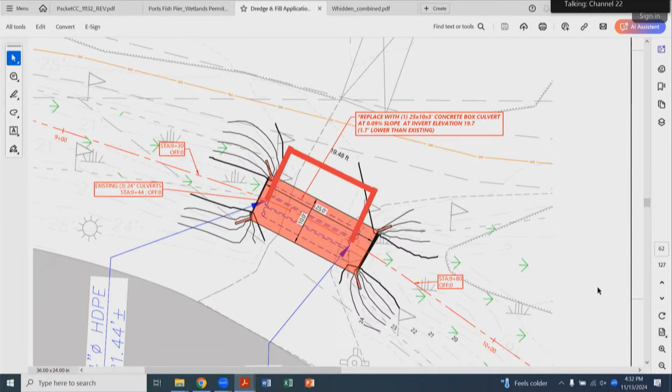Great. So I think what we discussed in the field is we would vote on the DES permit and then do a work session for the CUP. And then if anything changed coming out of the work session for the CUP that needed to then be changed in the DES permit, I guess you would go for an amendment, is that right, to the DES permit?

It's one of two things. We have 60 days, because we received the RFMI, to respond or request an extension, depending on their timing with the conditional use process. If there are going to be serious changes to the plans, we'll hold off until there's an approved submittal.

I don't know, it's been a while since I've gone through the Portsmouth conditional use process since it went online, so I'm not too sure what significant changes might occur. So maybe it makes sense to do the work session for the CUP first, and then based on what we talk about, decide whether or not you want us to go forward with the DES. I think we talked in the field that you guys have to go through because you already requested the extension.

Okay, got it. The next meeting wouldn't. So, as far as DES is concerned, it's more or less, do you object to the project? Right, and then we can, okay.

So then, should we do a work session first to discuss everything? Would that be the best way to do it? I don't know, it's a little, I'm not sure how much. Horse before the cart or whatever. The general discussion and premise of the...

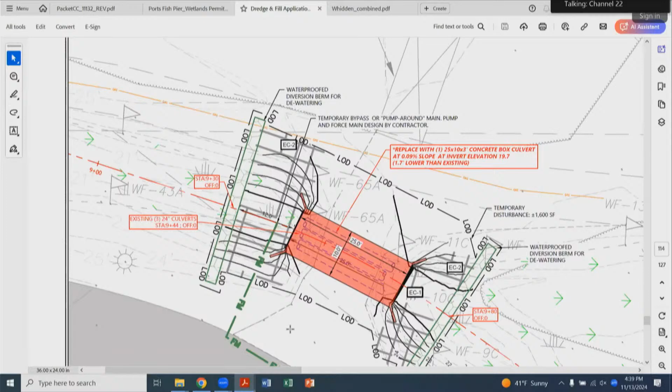So then how is it going to be revegetated? I believe that's on the following page, and I think it's jute matting to be maintained, just side slope stabilization.

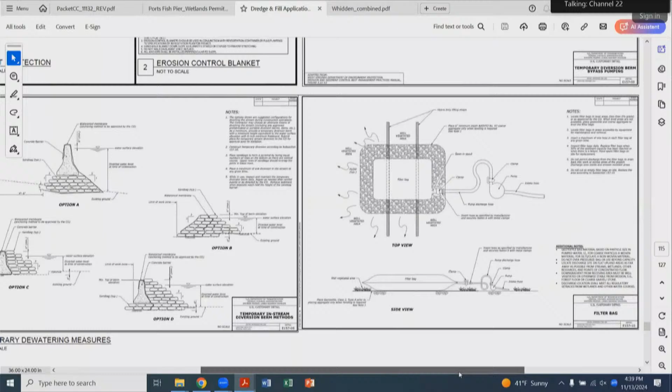I know there's some management of the bank right now on either side, general landscaping, but to my knowledge it's not supposed to be let go natural to totally revegetate. It's not the plan, or I don't believe so. It probably will go back to what it is right now. Currently, looking at the crossing on the left side, it was grass with some small emergent vegetation. On the right side, it was more persistent vegetation with cattails and stuff growing on the bank.

So they're not planning on... sorry, I can't find the sheet I'm looking for. There were grading notes on page 109 in the packet for this project, in C2002.

Can I ask, they do mention fertilizer as part of their revegetation plan, in several places. Barbara, you said they do mention fertilizer? Yeah, you see it on a lot of the sheets, CO-01, C200.

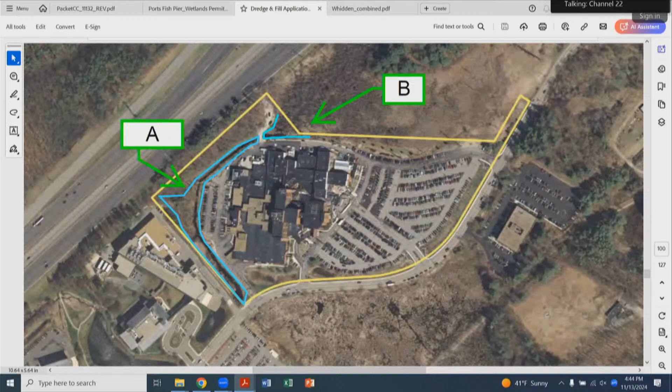Has it been researched or not? No, because it's not clear. I don't believe the only thing looked at as far as that southern wetland was the entire drainage area for what is going through that culvert. It's really not that one specific area. It would be similar to looking at one of the Liberty Mutual ponds - I understand the size difference, but everything's connected. We can't look at that drainage without considering it's connected to the wetland on the other side of the road and say we don't need to look at it because it's not part of the project.

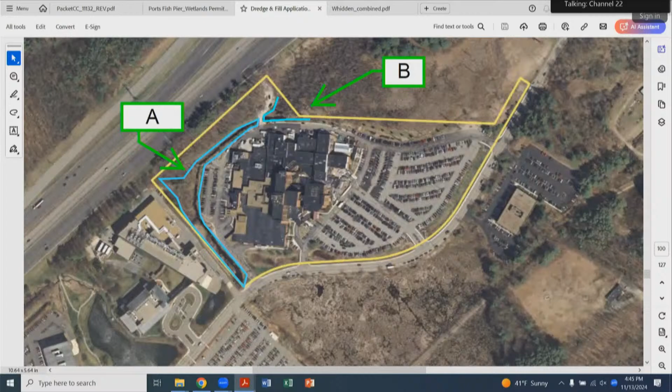That was one of the issues brought up by... his name slips me, I remember his first name, Dave... Devosis? Yes. He was saying that area is causing flooding because of our drainage area, it's not accepting that water. So the idea behind this is to improve that, not necessarily drain it, but during storm events, accept more water.

As far as what its specific hydrologic contribution is and how that will be affected, we've not looked into it. And rather than drain it, has there been any consideration given to increasing the amount of water that can be absorbed by that area through plantings or anything else? Not in that regard, no. As far as trying to mitigate by water consumption from vascular plants, no.

Thank you. Yep. Other questions?

Going back to a topic we already talked about, there is an apron, a riprap apron. Maybe that's what you were referring to. In the last sheet I think I saw outlet protection, and the dimensions are actually not very easy to decipher. It's on the last sheet for the plans, our far left, up, yeah.

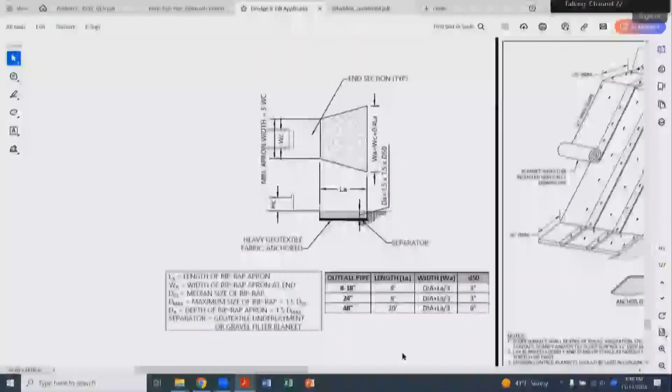If a riprap apron was required due to any velocity issues, and if there are any plan changes to this, we'd have to go back to Fish and Game to make sure. If he was proposing riprap, they would probably come back and say they want smooth river stone or something more turtle friendly.

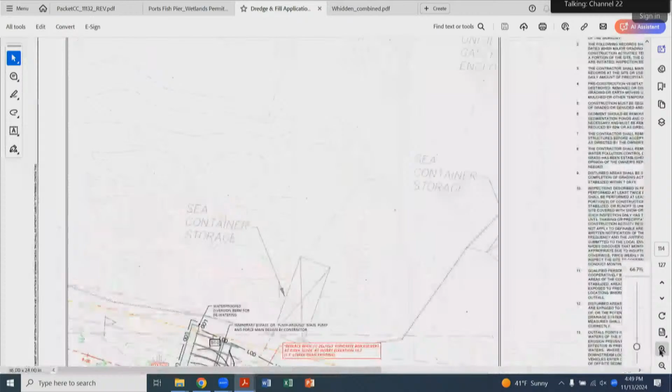Looking at this diagram, there are gray lines at either end of the box culvert. Are those just depicting the areas that are going to be regraded using that blanket? That's my understanding. They have a legend on this page showing what things are supposed to be, and that's EC2, permanent stabilization, in the second box down.

They also call out outlet protection, but if you note, it's not shown anywhere. I'm not sure if it's just a copy and paste error on the drawings or not.

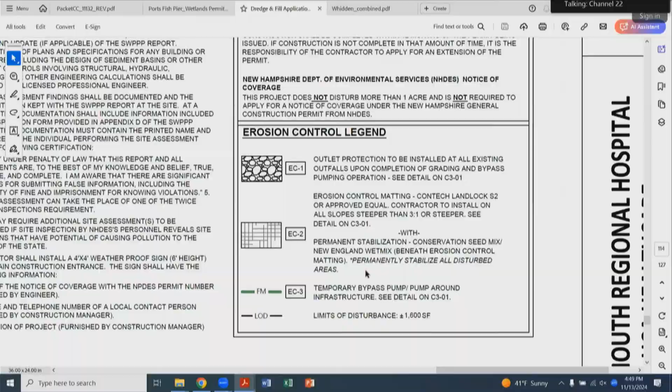So do your impact numbers reflect riprap? Do you know? The impact area, as far as the permanent impacts, those numbers were taken from what the engineer told us they were, and we tried to relay those from the plan. The engineer's from Kentucky, so they're not 100% familiar with the process and what we consider temporary and permanent impacts. I don't know if it's just standard practice that they put riprap at the end of their culverts or not, and just don't show it on the plan.

The engineer has to be New Hampshire state certified. They do, I think. Oh, no, I thought that was a question. Sorry. Well, I would hope, even if they're from Kentucky, they would know what they're doing. I know that they're a professional engineer, I just don't know if they're up to spec on what's required for the state permitting stuff.

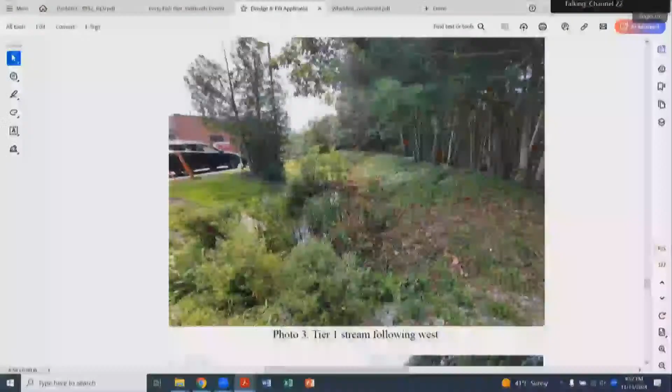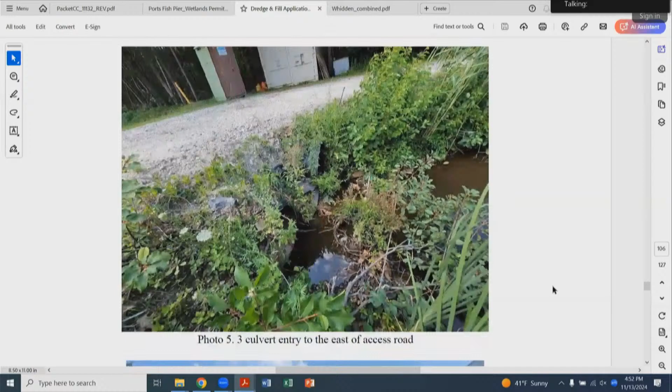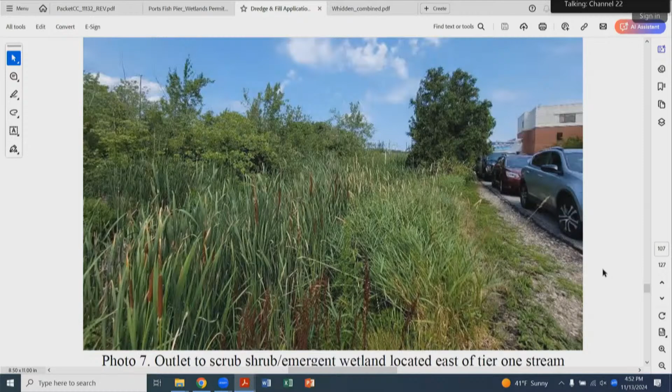And then on the other side, to the right of the crossing, it's not as prevalent in some areas, but it's definitely present on the site. So there's no mention in the plans of any attempt to control the spread of it. I don't believe that it's part of our proposal. Given its prevalence in the area, it's not something we can really control. Maybe occasional cutting, but with proximity of everything in the area, it's an invasive species.

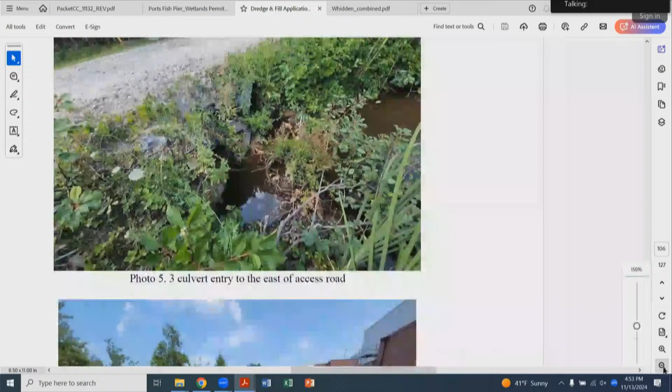So this goes along with the questions about vegetation, and there aren't really any details on what you're going to be planting, and if there's any attempt to not let the invasives be on the new banks you create at that point, and that you have something you're planting to avoid that, and what that is.

Any other questions? Okay, does someone want to make a motion for discussion purposes? This is for the DES wetland permit. I'll make a motion to recommend approval of 333 Borthwick, with probably some additional stipulations that this group will decide on during discussion. Do we have a second? Yep, second that.

I think there was a detail for the top of the culvert showing—there it is, thank you. Re-gravelled and compacted. It looks like it's 1.5 foot of compacted gravel backfill on top.

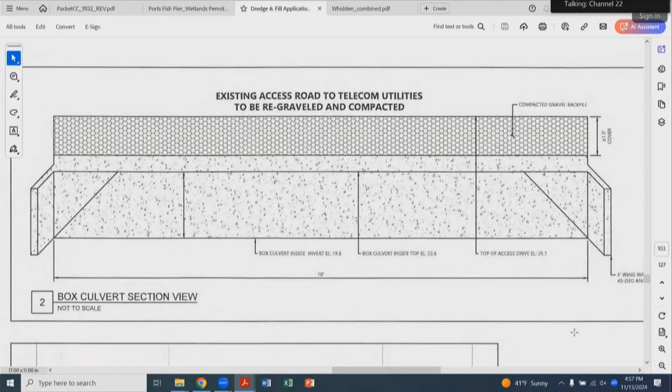The only other thing I could think of for the riprap apron was for the dewatering, because when you're bypassing that, it needs some kind of protection. I can't find it in the plans right now, but that's the only other thought I had on it. As a temporary kind of thing, and probably in the uplands, not directly discharged into the wetland.

So two things. One, with the fertilizer, I think maybe the best way to do it is to just make a note that the notes in the plans again do not include fertilizer application.

I had a question about the riprap on the bank. Did we all decide that wasn't going to happen? It sounded like there was no riprap on the bank. It doesn't look like it was. Yeah, it's just gonna remain as graded work. We don't need that—mats are clarified.

No, because when I looked, you see the detail of the... yeah, I think it's all the way at the end, sorry. Yeah, there you go.

The dark gray lines, I think, are that matting. Yeah, I think it's just grading. To my knowledge, it would be kind of an outlier from what's there right now—aesthetically, it wouldn't match what those banks are.

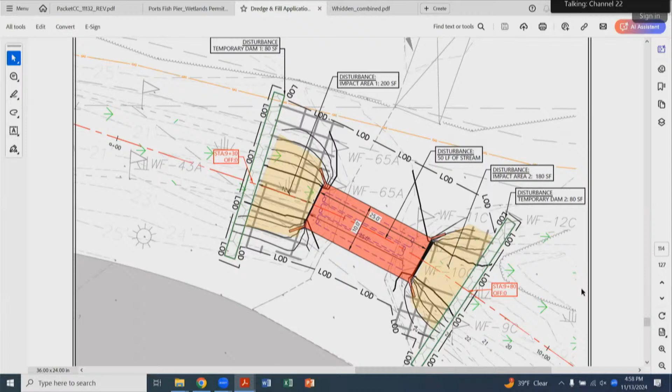So we don't need to comment on that? I don't think so. I think the point of clarification is the apron—they're showing the detail, but it's not on the plan, because it doesn't show anywhere on that plan riprap. Which is what I was confused about at first, but.

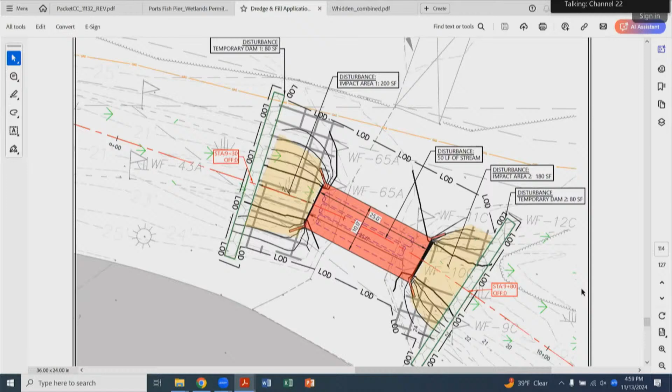Anything else you want to put in this letter about concerns? Just to clarify, I am seeing on that drawing where it says EC1, so that's calling for outlet protection, and then it calls on that detail with the apron.

But it's not on the plan—there's no... it's probably too small, I don't know. So you're right, it's called out in the legend for it, but not clearly shown.

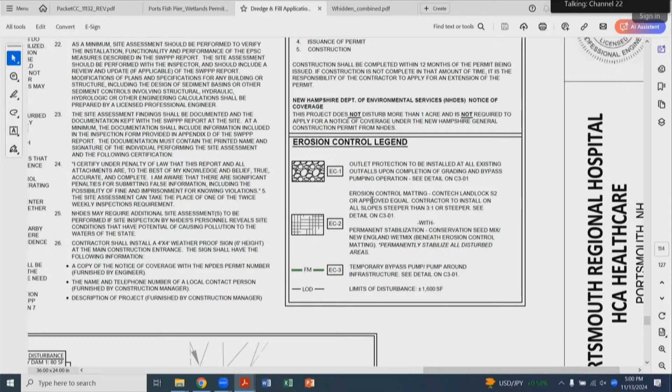This is the erosion control plan. So whether that's like a temporary solution to get the construction done, or whether that's like a long-term installation, it's a little unclear to me.

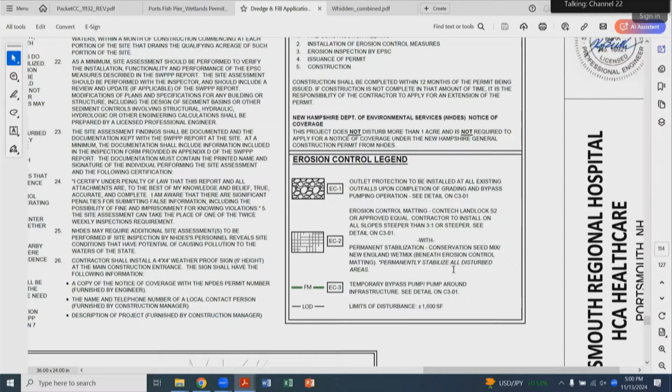Yeah, it does say upon completion of grading and bypass pumping operations, so it does make it sound like it is permanent and not just temporary.

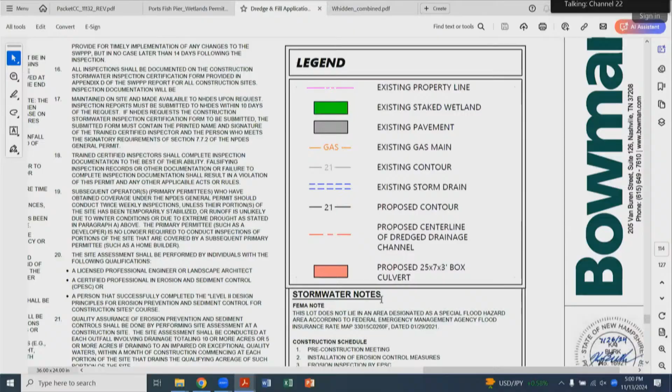So it would be nice to see where and how much, and how big, and is that really necessary, given that there isn't a huge concern for erosion?

Well, we do think there's going to be some dredging on either side, and there's going to be reshaping of that channel to go back. So there's a plan.

The initial design of this crossing—not crossing, but the whole channel—had an initial design slope. So the idea is to, in this area, bring it back to that original channel depth and everything, to kind of reestablish that. I think on the bottom right side, it kind of developed a little hole there, and I think they're gonna just reshape that so that it's more streamlined and not just a hole on the other side of the culvert.

Anything else anyone wants to add or talk about? We'll have another opportunity during the work session part.

This is sort of me just talking off the top of my head, but it seems like there's a lot of conditions we have here. I don't know if it's better to approve or deny with the conditions, because they're still going to have to do what they have, they'll still approve it eventually. We just have to make it clear that even if we approve, these are stipulations, and that doesn't work as well on the other end as it does for us.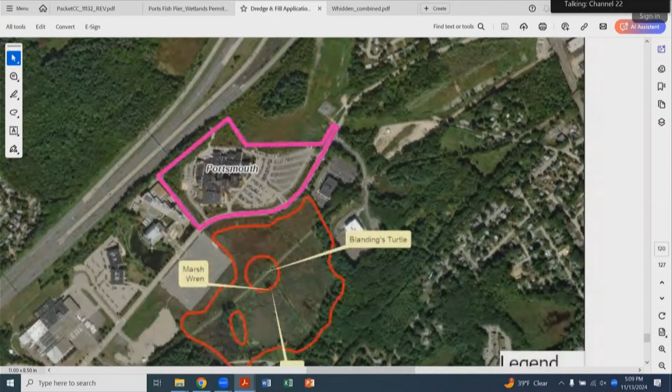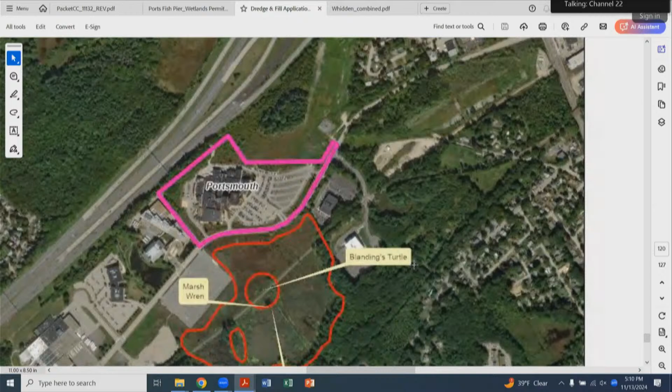And then Liberty Mutual is supposed to drain through that as well, but it's been backing up those two ponds right here. So if there are any flow calculations that were done, it would be good to know to see that replacing the box culvert is going to do something, as opposed to the original plan, which was dredging.

Based on the size of the culverts at Liberty Mutual versus what's going under Borthwick Ave, the Liberty Mutual ones are larger. So we'd expect a more impact as far as successfully having the drainage they anticipated when they designed their ponds. I think the limiting factor for that prime wetland would again be the Borthwick Ave crossing, but it's something the engineer can get numbers for.

Typically with an AOT project, we have to prove pre and post flows leaving the site and on the site, but this doesn't require an AOT, so we're just going based on: can the crossing handle the 100-year storm? Or the 50-year storm? What does it necessarily do to a wetland offsite?

Yeah, and that's where I have questions. We're running off assumptions, and it's great that there's extra flow, but is that extra flow going to impact the wetland? Because it's upstream. If you suddenly put a bridge there, is it going to totally drain it? Yeah, I absolutely get it.

If you go up to the existing conditions... I think it's down. Oh no, sorry, it might be up. Oh no, right, yes, I believe that's, so some of those areas are outside of the project area. They're in pretty close proximity to the existing parking areas.

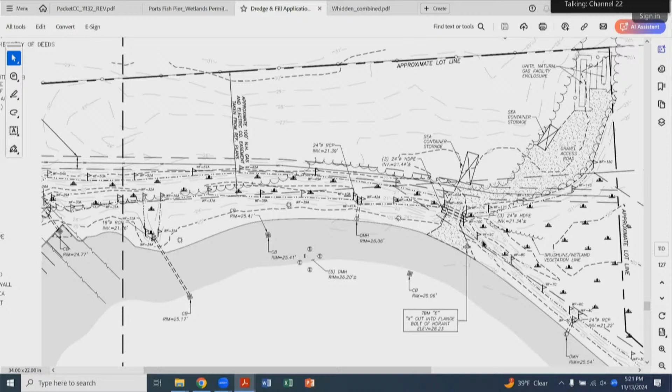We could probably effectively put some in the vicinity, but then there are areas where the wetland is pretty much on the parking lot, so it probably wouldn't make as much sense to do it there. Otherwise markers would be in the middle of the car park, which doesn't make much sense. Just traffic cones with signs. Yeah, I think at a minimum, kind of the area that you're working in.

And then if there's opportunity to go further upstream, right, up towards the wetland where there's grass areas, I think that would be prime. We'll probably have to limit it with proximity to the helipad. We'll take a look and see what we can add in there.

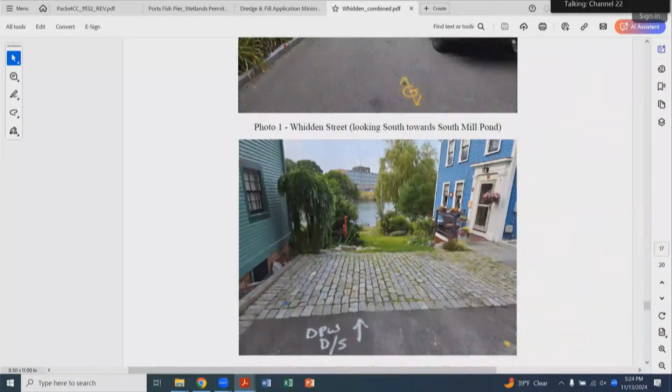That structure has an open grate similar to a catch basin, and the intent of that was to essentially take a 2-year rainstorm event and utilize the dry well to try to infiltrate that. Anything greater than a 2-year rain event would end up coming up through the grate and then flowing down. The original design was to flow down the city right-of-way and then out to the South Mill Pond.

What's happened over the last few years is the rain events have been enough to essentially topple over the side of the curbing that we have provided, and the runoff no longer goes in the city right-of-way and actually cascades into the property at number 50 Whidden Street, into their private property.

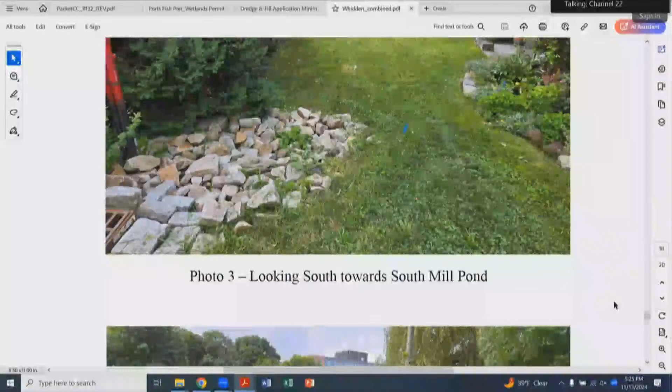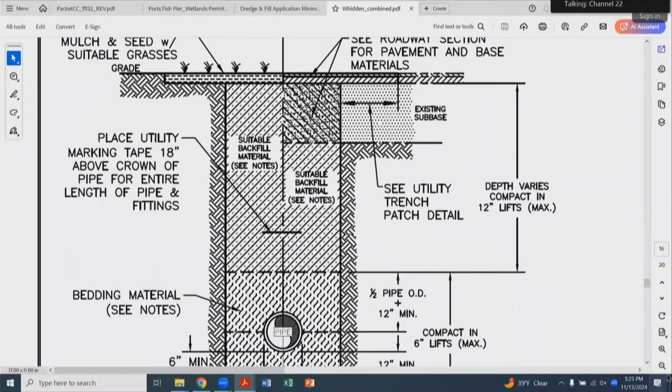So as part of this, we've gone back a few times to try to shore up the curbing on the side, some other minor improvements. They don't seem to have been working, so our current proposal is to tie into that drainage structure, the overflow structure, and install approximately 40 feet of drain pipe to discharge closer to South Mill Pond within the city right-of-way. That way ensuring that any of the runoff would not go onto private parcels and stay within the city right-of-way. So that's kind of our proposal for this.

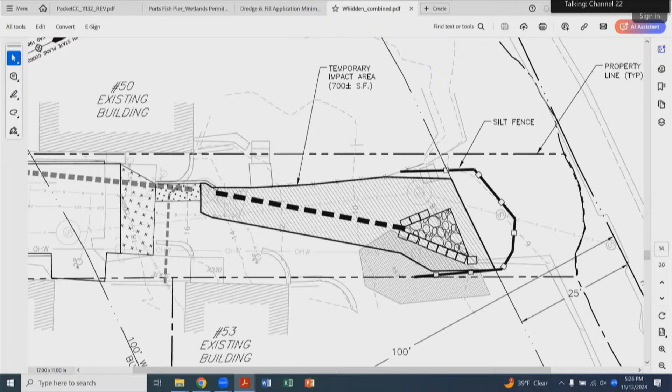I know we did a site walk last week and talked it over so you guys could also see the types of constraints that we were dealing with, how narrow the right-of-way is, how steep the right-of-way is, and that sort of thing, that this we felt was our best option to move forward on.

Great, thank you. Any questions? More of a, well, yes.

So it seems pretty clear today that the infrastructure in there was created for rain events that don't exist anymore. They keep overflowing. Could we approach this differently for the future? Instead of channeling the water, could we create some kind of sponge effect in the street? It's narrow, so why not embrace it with landscaping on both sides, native grasses, plants, trees, bushes that would absorb much more of that water and have less runoff at the end? Because if we keep channeling, today you're oversizing it, and in 10 years we'll have to oversize it again. Could we think instead of embracing the narrowness of that street, having it more open so there's more land, plants, pervious surface for the water to infiltrate instead of rushing to the end of the street?

Could you clarify that the two sewer manholes to the right of the outflow on the drawing are both watertight, and the one just north of it is not? That's correct. The elevations are at about 5 or 6 feet versus 8 or 9, so the elevation difference was about 3 feet. That one did not get a watertight cover.

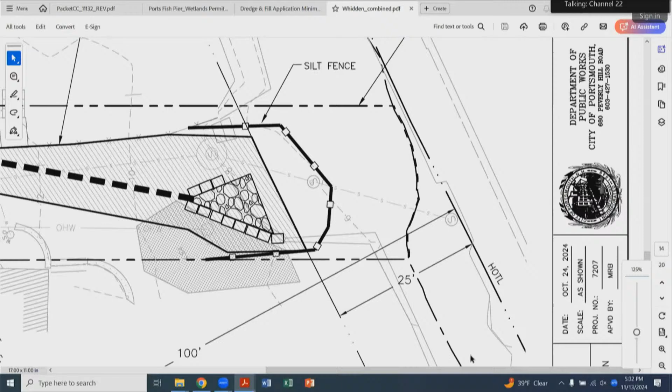And what do those manholes actually access? Is it the sewer main coming down Whidden Street? They tie into that, the one that's pretty close to where we're proposing the riprap outlet, and then that shoots off to the right past that one.

That sewer main connects along the entire South Mill Pond side, handling part of Marcy, Franklin Road, Franklin Street, and continuing down to Melcher, to Wentworth, and towards the Parrott Ave parking lot where it changes direction toward the wastewater treatment facility. That line handles the sewer for maybe 200 houses or more.

And then it gets pumped at some point, right? Because it's so low, it must get pumped. Yeah, I'm not sure exactly where, but once you get to Parrott Ave parking lot, it's like 12 feet deep. It's pretty deep there.

I'm not exactly sure at what point, but it might actually go all the way down to the Mechanic Street pump station before it has to pump over to Peirce Island. It's super cool, kind of fascinating. Yeah, thank you for sharing that.